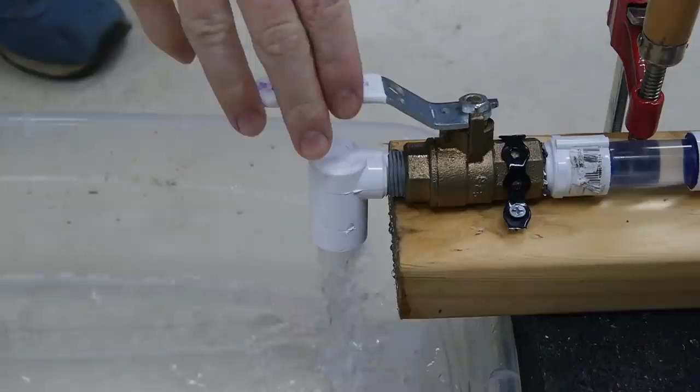It's easy to forget how heavy water is since we hardly ever carry more than a few ounces at a time. But if you add up all the water in the pipelines of your city, or even just the pipes in your house, it makes up quite a bit of mass. And when all that water is moving through a pipe, it has quite a bit of momentum.

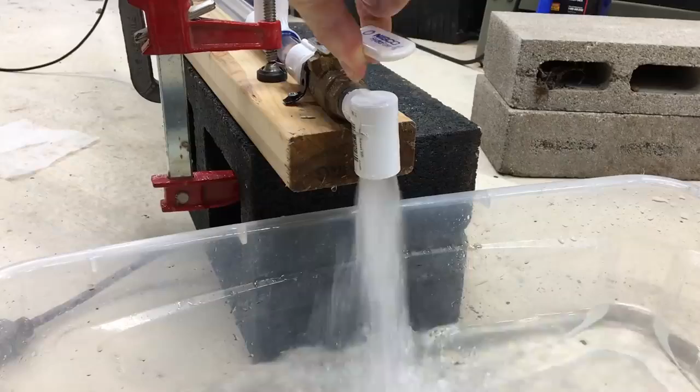If you suddenly stop that movement, for example by quickly closing a valve, all that momentum has nowhere to go. Since water isn't compressible or springy, it can't soften the blow. You might as well be slamming concrete into the back of the valve and the walls of your pipe. Instead of being absorbed, that sudden change in momentum creates a spike in pressure that travels as a shockwave through the pipe.

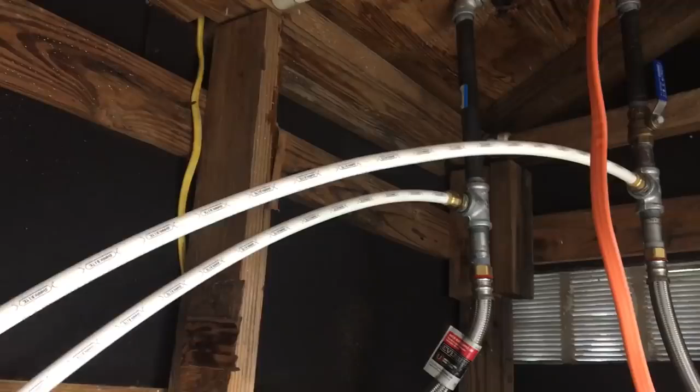Sometimes you'll even hear this shockwave as banging in your walls when you close a faucet or run the washing machine, hence the superhero-esque nickname, water hammer. Banging pipes inside your walls can sound a bit spooky, but for large diameter pipelines that can be hundreds of kilometers long, that surge in pressure from a change in momentum can cause major damage.

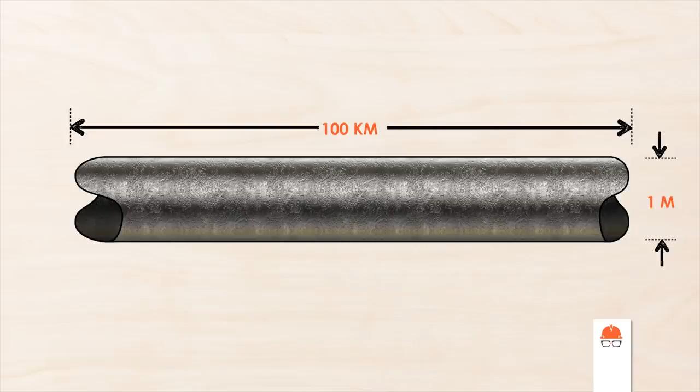Let's do a quick calculation. If you have a pipeline carrying water that is 1 meter in diameter and runs for 100 kilometers, a fairly average sized pipeline, the mass of water in the pipe is about 80 million kilograms. That's a lot of kilograms. In fact, it's the equivalent of about 10 freight trains.

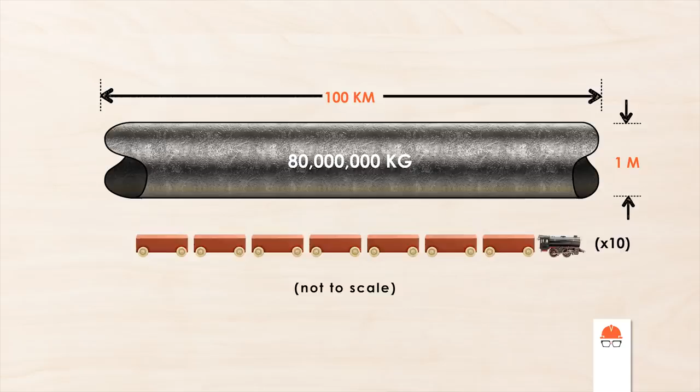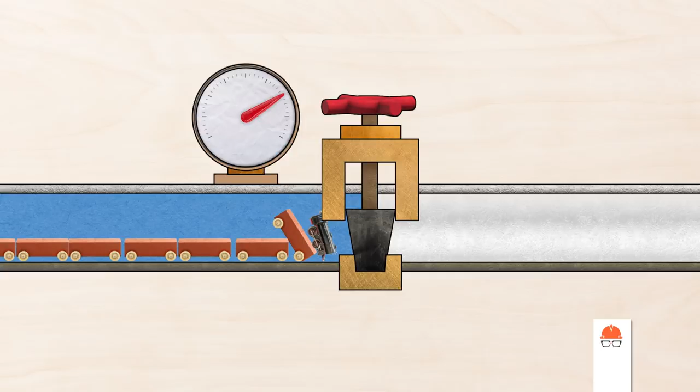Imagine you're an operator at the end of this pipeline in charge of closing a valve. If you close it quickly, you've essentially slammed those trains into a brick wall, and the pressure spike that results from such a sudden change in momentum can rupture the pipe or cause serious damage to other parts of the system. There's actually another term for when a large spike in pressure ruptures a sealed container, a bomb. And water hammer can be equally as dangerous.

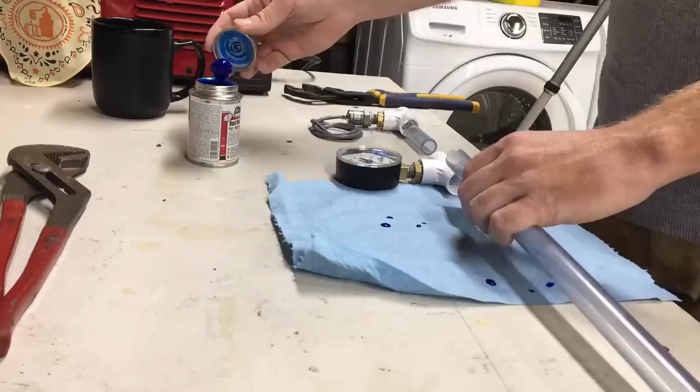So how do engineers design pipe systems to avoid this condition? Let's build a model pipeline and find out. Here's my setup. I've got about 100 feet or 30 meters of PVC pipe connected to the water on one end and a valve on the other. I also have an analog and digital gauge so we can see how the pressure changes, and a clear section of pipe in case anything exciting happens in there. I mean civil engineering exciting, not like actual exciting.

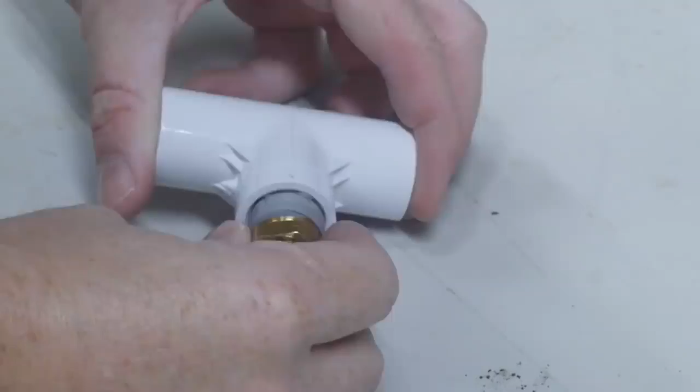You can see why designing a pipeline or pipe network can be a little more complicated than it seems. These spikes in pressure can travel through a system in complicated ways. But we can use this simple demonstration to show a few ways that engineers mitigate the potential damage from water hammer. This is the equation for the pressure profile of a water hammer pulse.

We're not going to do any calculus here, but the terms of this equation show the parameters that can be adjusted to dial back these damaging forces. And the first one is obvious. It's the speed at which the fluid is moving through the pipe. Reducing this is one of the simplest ways to reduce the effect of water hammer.

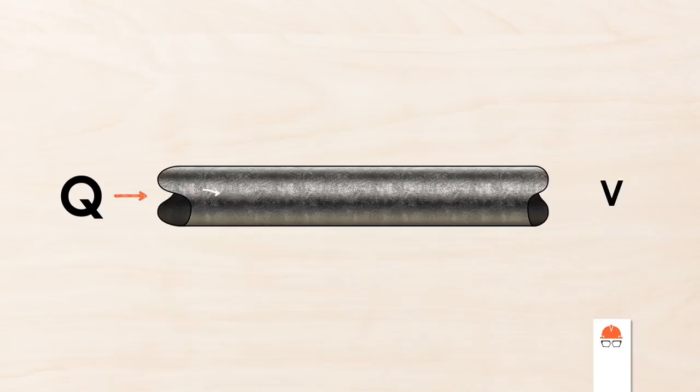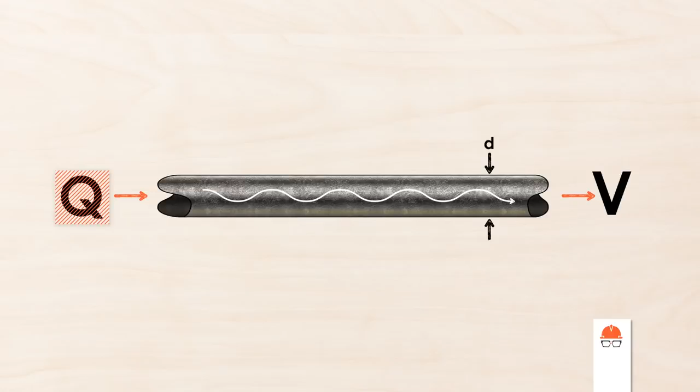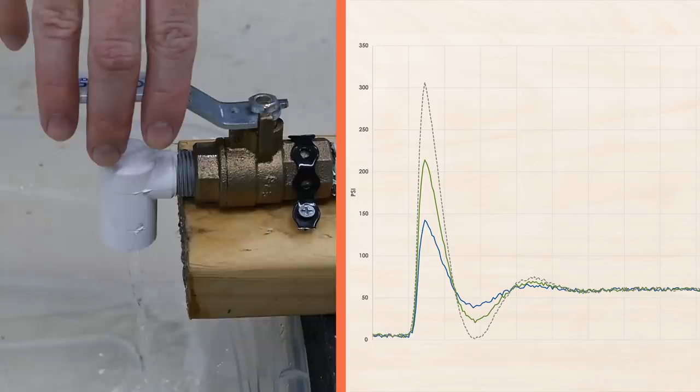Velocity is a function of the flow rate and the size of the pipe. If you're designing a pipeline, the flow rate might be fixed so you can increase the size of your pipe to reduce the velocity. A smaller pipe may be less expensive, but the flow velocity will be higher, which may cause issues with water hammer. In this case, my pipe size is fixed, but I can reduce the flow rate to limit the velocity. Each time I reduce the velocity and close the valve, the resulting spike in pressure decreases.

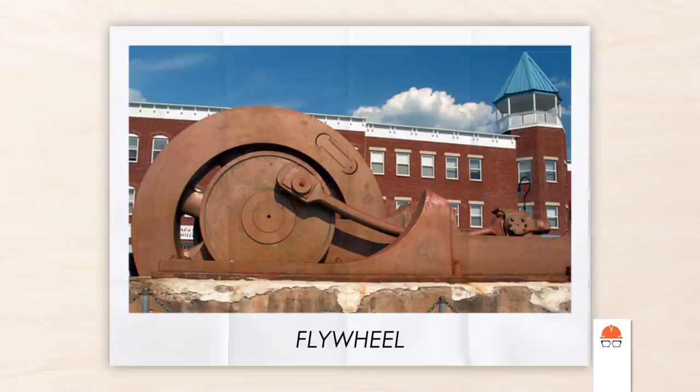Next, you can increase the time over which the change in momentum occurs. One common example of this is adding flywheels to pumps so they spin down more slowly rather than stopping suddenly. Another example is just to close valves more slowly. If I gently shut the valve rather than allowing it to snap shut, the pressure changes are more subtle.

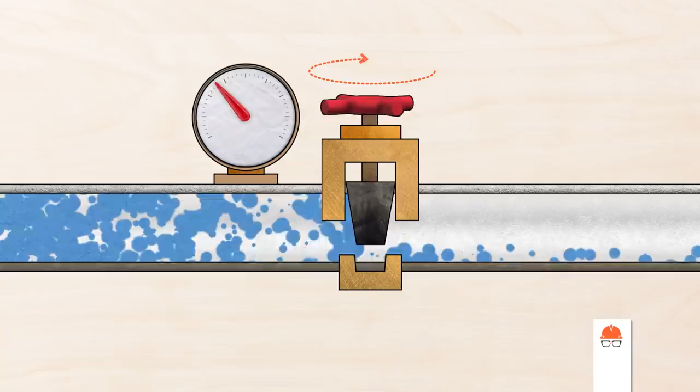On large pipelines, engineers not only design the components, but develop the requirements for operation of the equipment. This will almost always include rules for how quickly valves can be opened or closed to avoid issues with water hammer. The final parameter we can adjust is the speed of sound through the fluid, also known as wave celerity.

This describes how quickly a pressure wave can propagate through the pipe. The wave celerity is an indirect measure of the elasticity of the system, and it can depend on compressibility of the fluid, the material of the pipe, and whether or not it's buried in the ground. In a very rigid system, pressure waves can reflect easily without much attenuation.

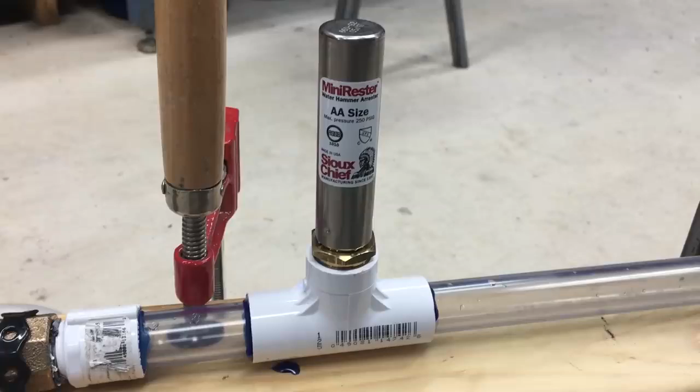I've got flexible PVC pipe sitting on the ground free to move, which is already helping reduce the magnitude of the water hammer. I can increase the flexibility even more by adding an anti-surge device. This has an air bladder that can absorb some of the shock and reduce the pressure spike even further. Anti-surge devices are very common in pipe systems, and they can be as simple as spring-loaded valves that open up if the pressure gets too high.

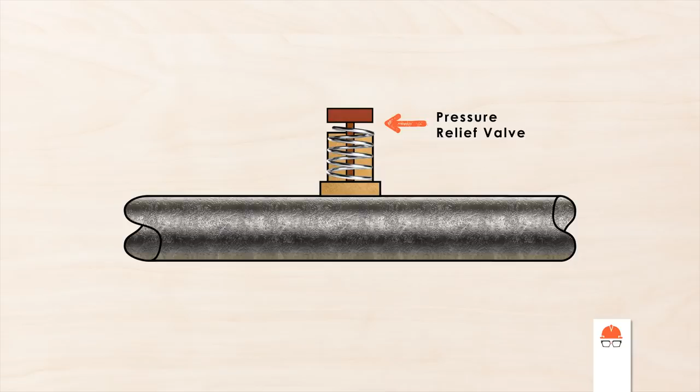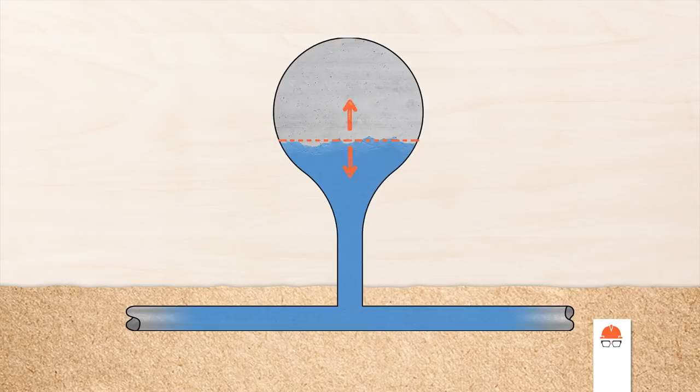In water distribution systems for urban areas, water towers help with surge control by allowing the free surface to move up and down, absorbing sudden changes in pressure. Plumbing is one of the under-acknowledged innovations that has made our modern society possible. But when you harness the power of water by putting it in pipes, it's easy to forget about that power altogether. Water can be as hard as concrete when confined, and if you bang two hard things together, eventually something's gonna break. If you're an engineer, your job is to make sure it's not the expensive infrastructure you designed.

Part of that means being able to predict surges in pressure due to water hammer, and design systems that can mitigate any potential damage that might result.